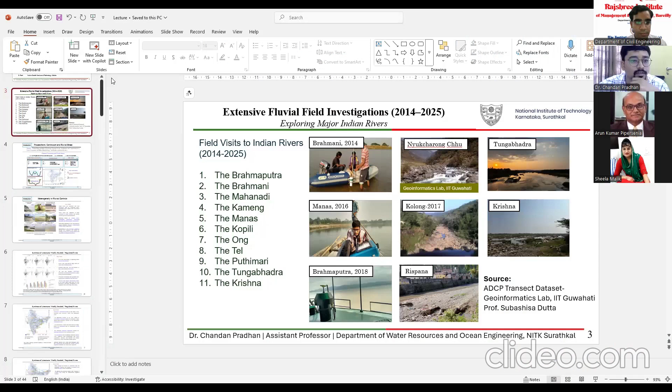I'm Dr. Chandan, currently working as the assistant professor in Department of Water Resource and Ocean Engineering. Prior to this, I did my PhD at IIT Guwahati in Department of Civil Engineering. After that, I was briefly working on the Himalayan River Basin for a smart flood monitoring project during my postdoctoral fellowship. And all my expertise so far is mostly on river recovery, river health monitoring, morphodynamic modeling, and process-based understanding of our Indian Himalayan and Peninsular river systems.

So I have been very grateful to get the opportunity to do my PhD and currently work as assistant professor at NIT Surathkal, very close to the Western Ghat river system. I've been part of many field visits for the last 10 years, including Brahmaputra, Brahmani, and currently I'm also part of a national mission project on Jal Shakti for the Krishna River basin. I'm also going to the field on our Western Ghat rivers, which are very dynamic and beautiful in nature, and their process-form understanding is very complex.

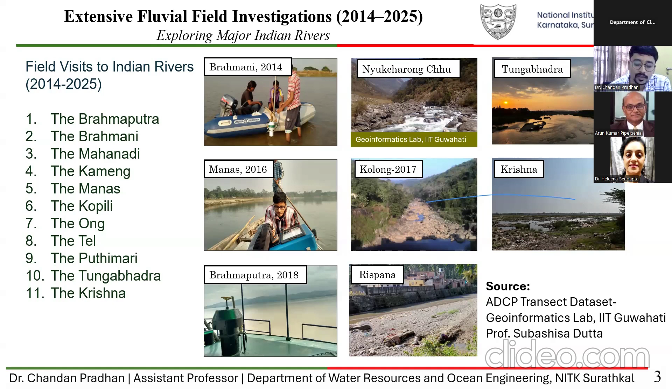So coming to today's session, mostly I'll highlight what our river recovery concept is, how it was started by the Australian and European groups of researchers, how we can implement it in our Indian river system, and what are the current advances in river basin management study in the line of river field visits. So I'll start with how river recovery came into the picture.

So far our knowledge on river health mostly deals with river water quality. For water quality, we have certain standardized parameters with certain ranges and threshold limits. If any two or three parameters change, then we have an idea about what biological degradation or physical changes are happening. So that we associate with our river health.

After 1990, mostly Australian and European groups of researchers started the concept of river recovery. River recovery means we give some kind of disturbance to the river system. After the disturbance, whether the river comes back to a natural state or develops another kind of altered condition, and how it affects the morphology, the biological properties, and the ecological enhancement of the river system.

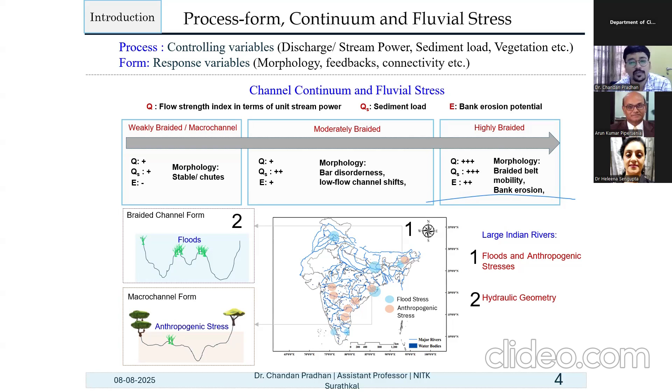So this came into the picture in the late 90s and it was first implemented by Australian researchers. In our Indian river system, the river recovery knowledge is very limited. So far, we have not done detailed study, mostly on the basis of morphology and how the morphology is interacting with our process and form.

So if you go to our Indian river system, the rivers are very dynamic in nature. If you go to the Brahmaputra river system, the Brahmaputra river system is highly dynamic in nature. It can have very high bank erosion. It can have a very large amount of debris load in terms of large tree trunks that can come and deposit during the floodplain. The bank of the river can be composite in nature.

Okay, so in case you go to the tributaries of the Brahmaputra, which are also very large in nature and also dynamic, some tributaries will form a gravel bed, some tributaries will form an alluvial bed. In addition to that, we have the anthropogenic disturbances in terms of dams, weirs, and barrages. So there is a very complex process-form understanding that is happening inside the river system.

Now, if you come to our peninsular river system, the peninsular rivers are mostly stable. Okay, the banks of the peninsular rivers are very much stable, and we can see most of the dynamic properties of the morphological part of this Indian peninsular river system are happening inside the river. So sometimes the in-stream vegetation can be enhanced.

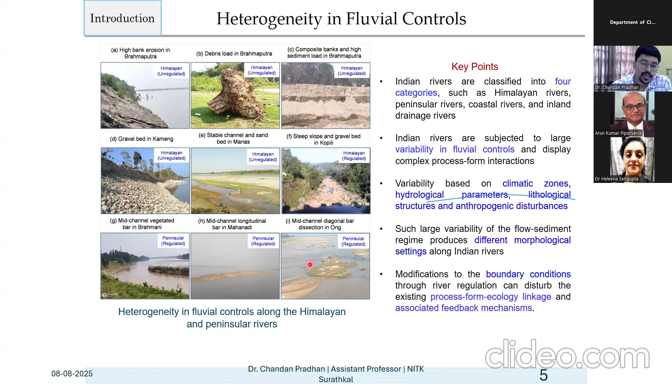So in addition to that, in our Indian river system, we have a very large number of dams, weirs, and barrages. When you build any kind of dams, weirs, and barrages, there are three cascading effects. The first one is the change in your flow hydrology and the sediment part. Second, changes that can happen in the morphology, and the third, the third order impact, is on the ecology part.

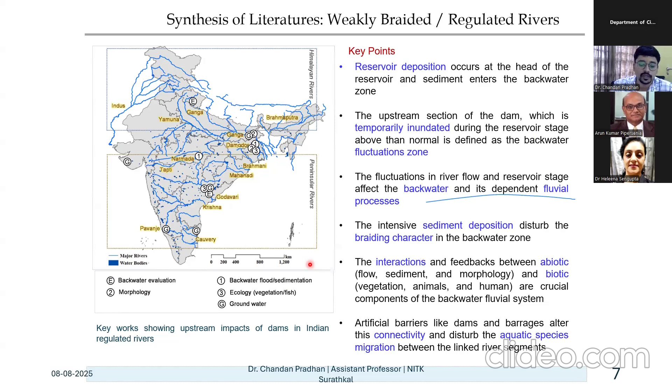So whenever we are disturbing the river, there will be a cascading process, or it can happen simultaneously. That will be the interaction between your flow hydrology, morphology, and ecology. Our river systems are very large in nature. So whenever we give any kind of disturbance to the river, the disturbance propagates both in the upstream direction as well as in the downstream direction. Currently we are only quantifying what changes are happening.

So in order to understand the process behind the changes, we need a very detailed, thorough understanding of what the river resilience is, what the river recovery potential is, how the different components of the rivers are interacting with each other, and how significant the climate change impact as well as the anthropogenic impact is. From that we have different concepts, like 12 concepts of river recovery or geomorphology, such as river recovery, river connectivity, river sensitivity, what is the channel forming discharge at the upstream end, and what is the channel forming discharge at the downstream end.

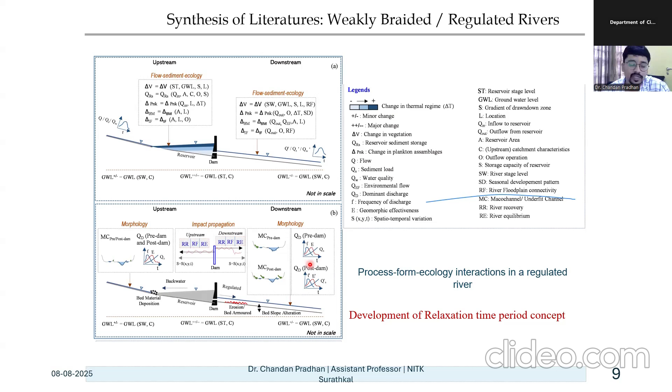So we have a very complex process-form understanding and interaction happening for both our Himalayan and peninsular rivers. As well, when we give any kind of disturbance to the river system, the first thing that happens inside the river is a relaxation time period starts. For example, if we are building a dam in 1980, maybe after 30-40 years the river will adjust to the changes. But after 30 years maybe the disturbance will start to propagate and the river may change its morphological pattern, may change its ecological behavior.

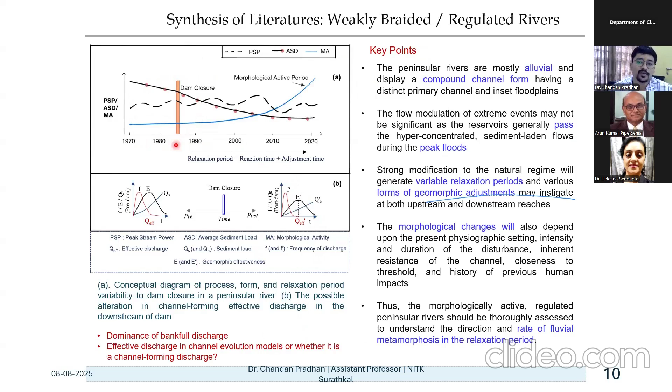So whenever we are discussing any kind of river system, we have to be very careful about how the river dynamics are, how the flow, sediment, morphology, and ecology are interacting with each other, and what additional climate change impacts or anthropogenic impacts are prevailing inside the river system.

So to understand this, we took the first study area, study area 1 in Odisha. That is one large river system, the Brahmani river system.

So in case of the Brahmani river system, it is a large river having a catchment area of more than 39,000 square kilometers. There is a large dam, that is the Rengali Dam, constructed in 1985.

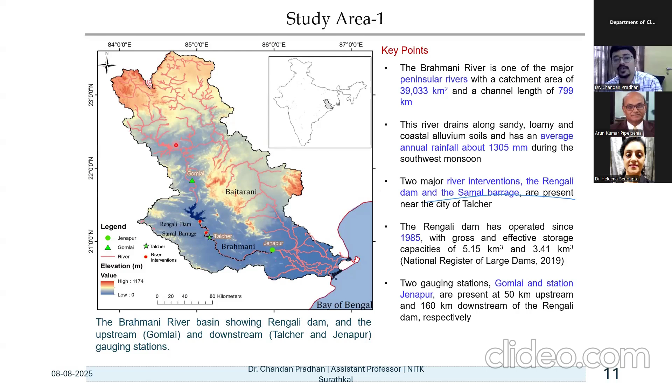So gradually, we have seen during our field visit that braid formation, or sandbar formation inside the river, is happening, and the sandbar formation is very rapidly increasing in recent years in the downstream end. So we thought of how to integrate the channel forming discharge to this kind of river system, where we can quantify which discharge is responsible for braid bar initiation and which discharge is responsible for the changes in the in-stream behavior property.

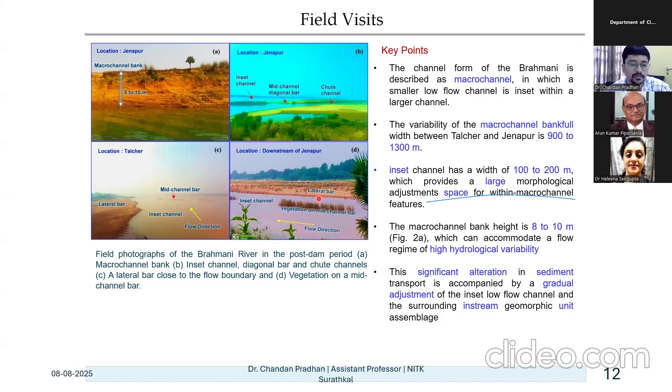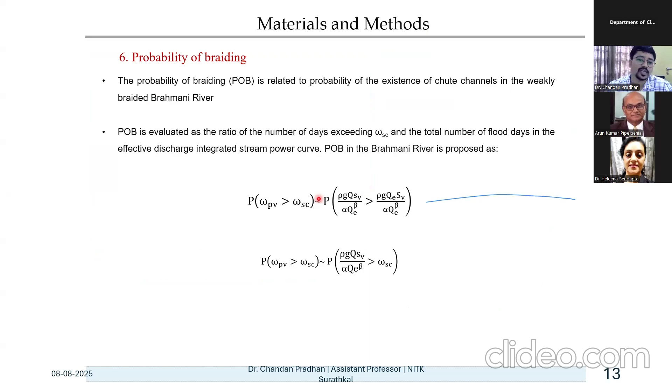At a few locations we have seen that inside the river there will be a mid channel bar, and on the mid channel bar we have vegetation. So there is an indirect indication that the vegetation is gradually stabilizing inside the river system. And we thought of proposing one equation such that we can quantify in future how much change in braiding behavior will be there. So we term that equation the probability of braiding equation, and we developed a concept of threshold energy such that whenever the river is exceeding any kind of threshold, the extra amount of energy the river has can be dissipated forming sandbars or morphological dynamics.

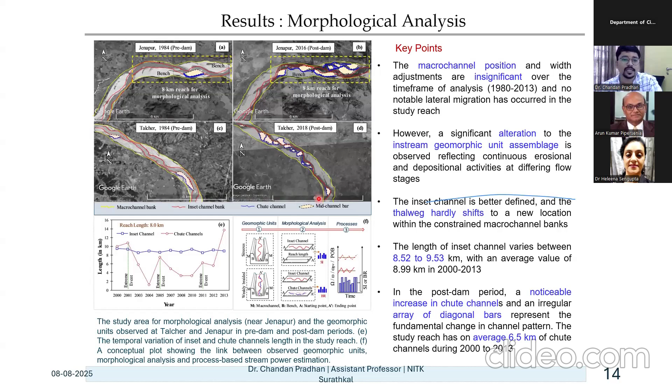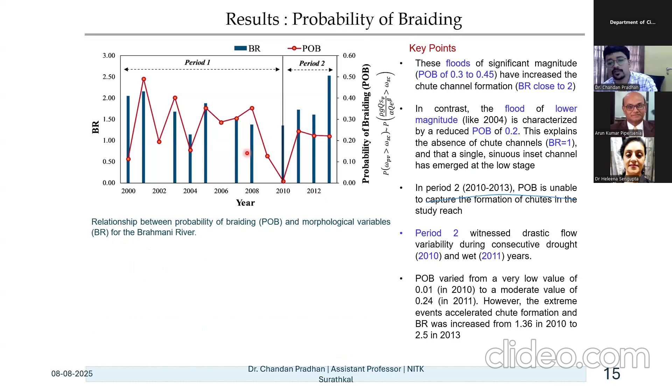So with the help of geospatial technology through remote sensing, we analyzed the Landsat data. We have long-term flow sediment data along with very thorough field verification. We indicated one study area and applied that mathematical equation, and we found that whenever the river is exceeding threshold energy, the river is dissipating that extra energy by forming morphological units, geomorphic units such as sandbars. And if the sandbar is gradually stabilizing, then in-stream vegetation comes into the picture. So the whole idea behind this study was to find out which one is the channel forming discharge.

So in very simple terms, when we talk about the channel forming discharge for any river system, we take that there are three types of channel forming discharge. One is bankfull discharge. That means the flow from bank to bank during very high peak floods that controls the channel. Also, in traditional knowledge we have the effective discharge. Effective discharge is the discharge which carries the sediment load in the long term. So maybe that discharge is responsible for the channel behavior. Also, some researchers have linked a return period of 1.5 years with the channel forming discharge.

So through this study, we propose that in case of peninsular rivers, which are very macrochannel in nature, or have channel-in-channel physiography or compound forms, there can be multiple channel forming discharges. So one channel forming discharge can maintain the high macrochannel bank. One small channel forming discharge can maintain the smaller channel or the inset channel, and in between, the extra amount of energy exceeding the threshold can be dissipated forming sandbars or any kind of morphology pattern. So this was the whole idea behind the initiation of river recovery work.

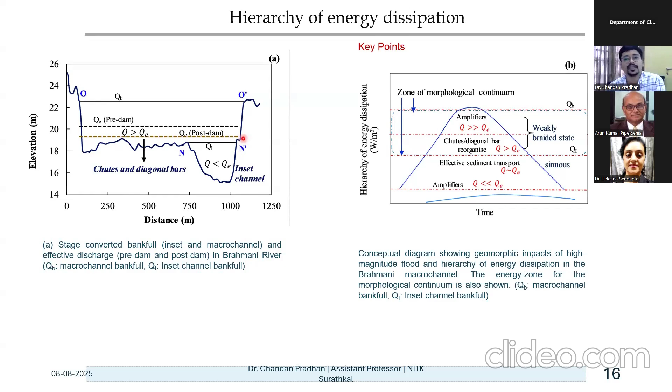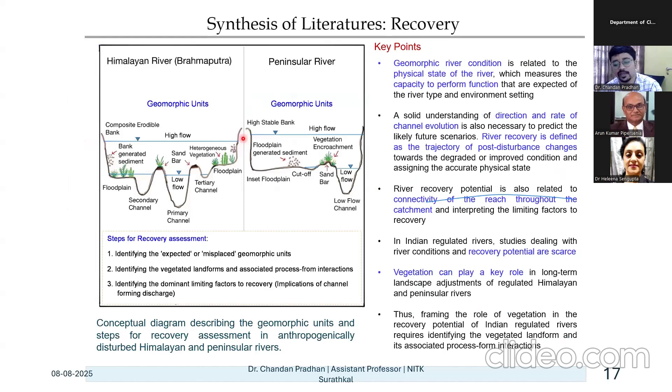So then we proceeded to understanding how we can integrate vegetation landforms into this kind of equation. So whenever we discuss river recovery, as I was telling, this was started from the Australian river, that is the Bega catchment. So whenever we give any kind of disturbance to the river system, it can go to a degraded condition or it can itself create a new kind of improved condition.

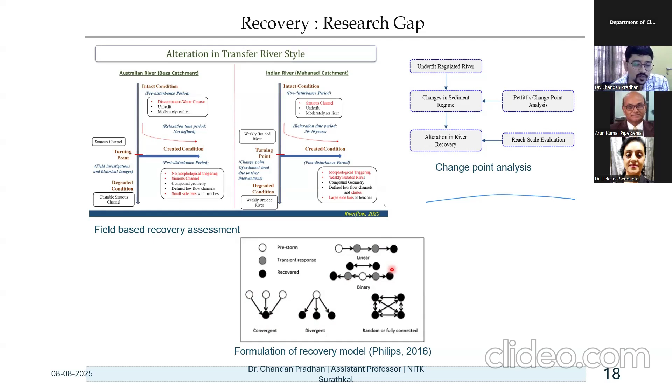So in case of our peninsular rivers, again we saw that if you take one cross section of the river, the rivers are mostly macrochannel form. Here the floodplain vegetation and large tree trunks are there.

In case of in-channel physiography, we can see sometimes chute channel cutoff will be there, mid-channel bar formation will be there. On the bar, sometimes extreme vegetation stabilization will be there. Close to the bank, bench formation will happen. So different zones of floodplain, different zones of interaction between flow, sediment, morphology, and ecology are there, and different types of channel forming discharge can be formed depending upon which zone we are interacting with.

So we have different inundation depth, different duration frequency analysis, different rainfall contribution, different groundwater moisture levels. So this is very complex in nature, and this can be taken as one randomly interconnected kind of river recovery model. Then we proceed to our study area selection.

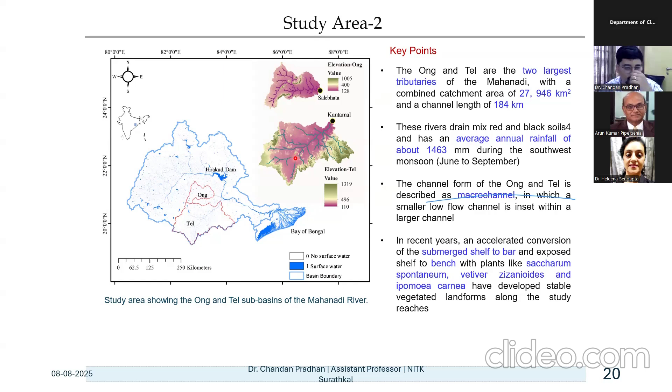We selected the Mahanadi River, one stretch of the Mahanadi just downstream of Hirakud Dam. The Hirakud Dam is a very large dam which significantly controls the flow, sediment, morphology as well as the ecology of the Mahanadi River. We did extensive field visits, mostly in the pre-monsoon and post-monsoon, and we saw that the study area is gradually stabilizing through linear bench formation.

A bench is nothing but where vegetation colonization is happening inside the river. Here the vegetation colonization is mostly on the linear bench. Sometimes close to the low flow channel we have lateral bars, and these lateral bars are colonized by six types of vegetation patches. These six types of vegetation, with different plant form, planting time, spreading potential, and height, indirectly control the morphology as well as the flood inundation behavior inside the river system.

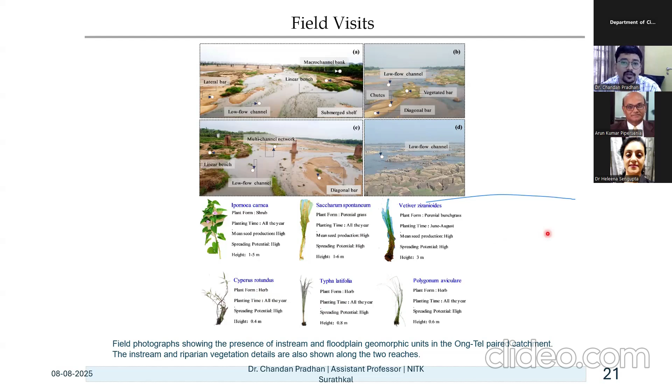So we thought of how to integrate this in-stream vegetation landform into our river recovery model. To propose a river recovery model, we took the help of two indices. One is in-stream vegetation through NDVI classification in the Google Earth Engine environment, through long-term spatio-temporal analysis from 1985 to 2020. We calculate what in-stream vegetation is inside the channel through NDVI.

Also, at the gauging location we took the change in the hydraulic property or hydraulic geometry that is happening. So we developed one entropy indicator that we term the cross-sectional intensity entropy indicator.

Sorry, mistakenly muted. Sir, please unmute. Actually, oh, now it is okay.

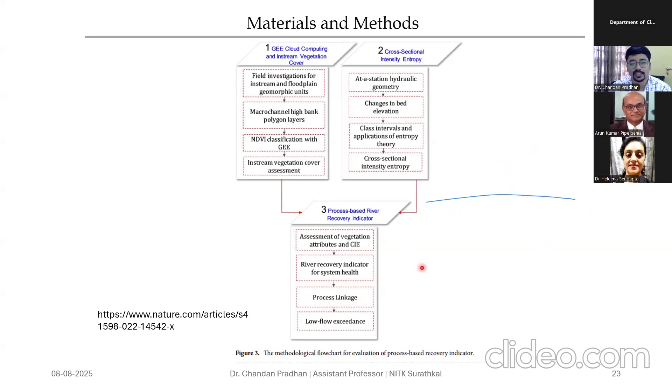Yes, sir. Okay. So we integrated both the Google Earth Engine based cloud computing of vegetation and the cross-sectional entropy, and formed one river recovery indicator that we term normalized river recovery. And we link this normalized river recovery with our process-based indicator from the first study area, the Brahmani, formed through our channel forming discharge.

We took the help of Survey of India topography to analyze the bank behavior. We saw that during the last 50 to 60 years, the main channel bank is very stable in nature. But inside the channel, the vegetated landforms are slowly growing in nature.

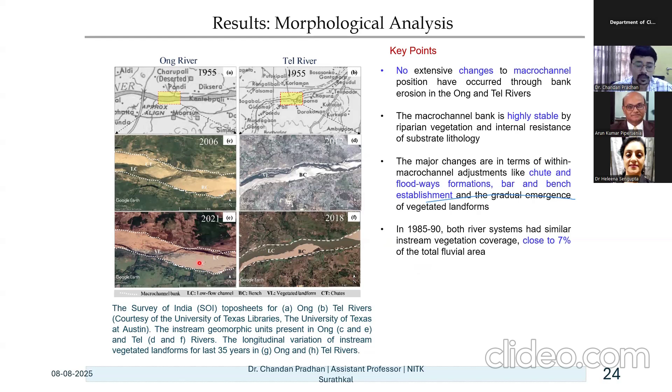So we thought of taking two contrasting study areas, tributaries of the Mahanadi. Both are controlled by regulated flow. And we saw where the high density of plant biomass is. In one case the plant biomass is very close to the bank. In the other case, the plant biomass density is more inside the in-stream channel.

Okay. But in both cases, we have seen that from 1985 to 2020, the in-stream vegetation patches are increasing. So we developed one indicator, the normalized river recovery indicator NRRI, and we linked it with vegetation percentage and the change in the entropy value.

We saw that for the river where plant biomass is significantly dominating over the entropy of the change in channel cross section, the river has a very strong recovery potential. So in a direct way we can say that up to a certain percentage, vegetation inside the river system can help stabilize lateral bars or longitudinal bars and the morphological behavior, helping stabilize the river system, and the recovery potential of the river can be increased.

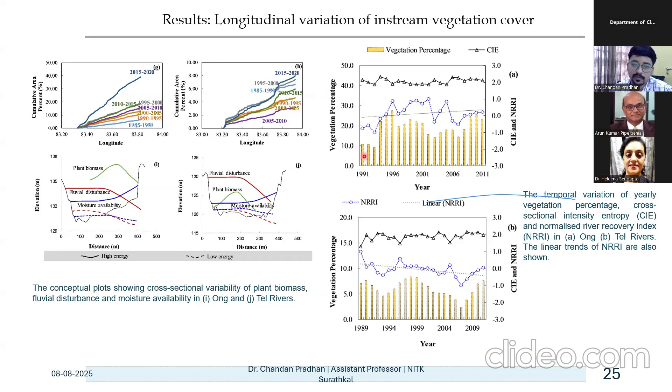So we thought of linking with one conceptual diagram between two endpoints, because we are discussing the river recovery model. Here one endpoint will be fluvial disturbance, that is FD. Another endpoint can be self-organization of the vegetated landform, let's say SO.

So self-organization of the vegetated landform, if it is dominating over the fluvial disturbances in terms of the flood, then means there will be a high chance of the river recovery potential inside the river system, and the river can maintain a very good health or the river recovery health. But where the repetitive fluvial disturbances dominate over the self-organization of the vegetated landform, in that case the morphological dynamic will be very much active in nature, and the river recovery potential may decrease in such river system.

So far I was discussing channel forming discharge and the river recovery for smaller river system that is weakly braided form. But how to integrate this theory for a large braided river system which is very dynamic in nature? That is the Brahmaputra river. So if you compare any kind of peninsular river with our Brahmaputra river system, we can say that the Brahmaputra is very highly braided in nature, whereas our peninsular rivers can be moderately compound, macrochannel form, and weakly braided. The banks of the river can be unstable because Brahmaputra is prone to very much high bank erosion, but in case of the peninsular river, it is mostly stable.

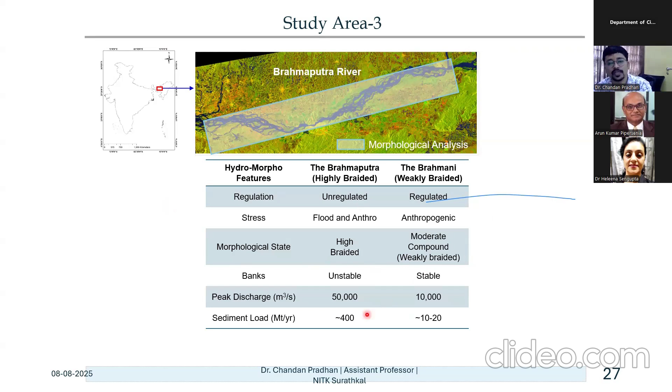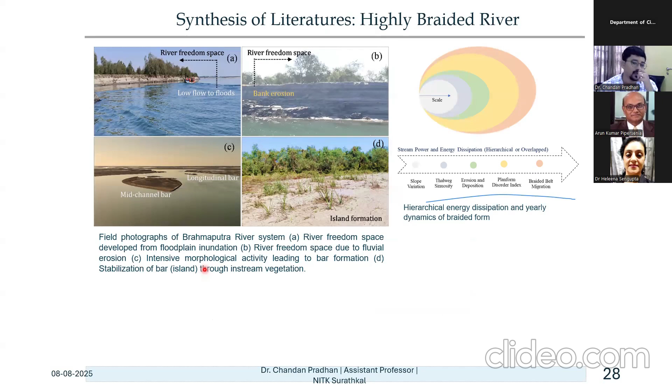The peak discharge in the Brahmaputra can exceed 50,000 meter cube per second. Also, the sediment load can be in terms of 400 million ton per year. So we are dealing with a river system which has very much high sediment load, bank erosion potential, the discharge variability, as well as the morphology. If you see, all kind of geomorphic units starting from the mid-channel bar to longitudinal bar, and the island formations are there. These islands are much more stable inside the nature, and they also contribute to the morphodynamics of the Brahmaputra river system. So how to develop a recovery model and how to categorize any kind of resilience based morphological or management strategy for such highly dynamic nature.

So we thought of taking the help of Google Earth Engine cloud computing. So with the JRC surface water data, we find out the post-monsoon median low flow images. So from these low flow images, we find out what are the dominant geomorphic units there. From the dominant geomorphic unit, we thought of developing one indicator, that is our locational probability index. So I'll not go much detail into this locational probability. That means that I'll assign one probability value to each river pixel inside the river, and what are the chances of getting the low flow channel at the particular location.

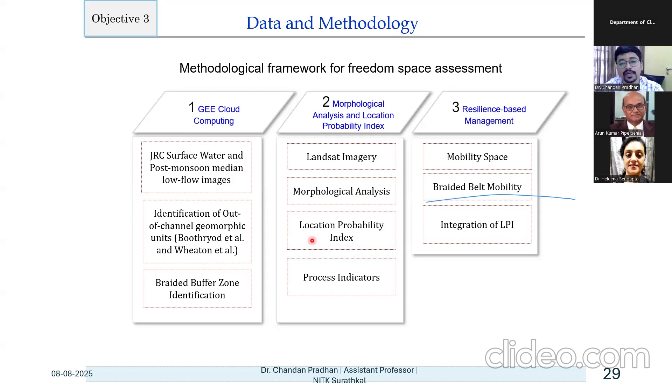So indirectly, this locational probability index will tell me what is the river recovery or the resilience of the river system. Then we linked this LPI or the locational probability index to any kind of process-based indicator, whether it can be a channel forming discharge in terms of the bankfull discharge, effective discharge, or a discharge with certain return period. So for the last 35 years of Google Earth Engine data, we classify the river into different zones. One zone can be nodal point where the river width is very much smaller. Similarly, it can propagate from the moderately braided to highly braided, and we can see the river has very dynamic low flow channel as well as the sandbar dynamics, and they are complexly interacting with each other to form a very much highly braided nature.

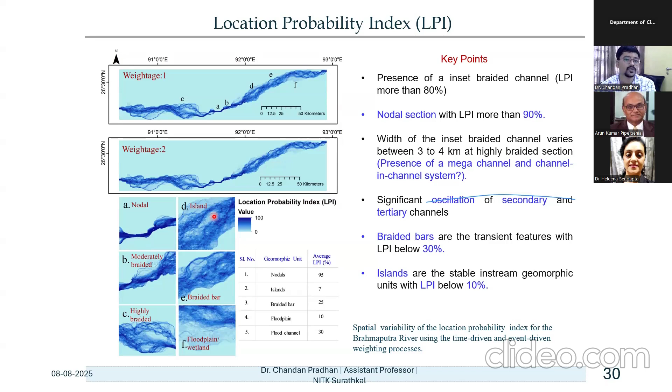So we thought of linking this with this spring theory such that, in a highly braided form, the river may have two thresholds. So one threshold will operate at a low flow end, another threshold will operate at the high flow end, and the river will oscillate between one end of the threshold to the other end threshold. Here, the primary channel will be linked with the secondary channel. Secondary channel will be linked with the third order channel. And all three are connected with the spring theory. So whenever one disturbance to the primary channel is happening, it will propagate to the tertiary channel. And whenever any disturbance to the third order channel, that may also propagate back to the primary channel.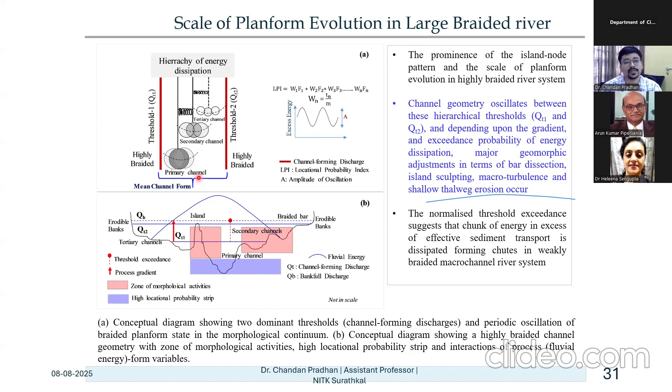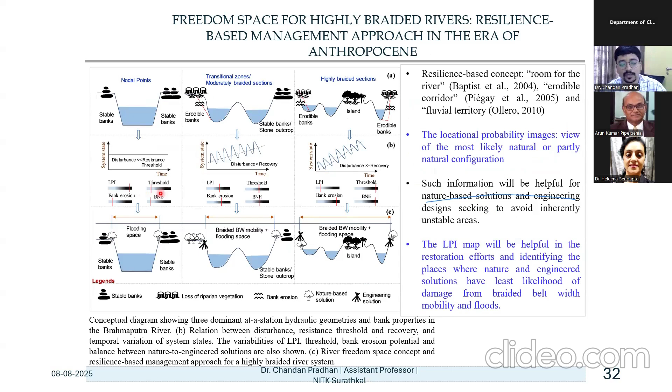So this we published in Catena Journal, and we thought of developing one resilience-based management strategy based on what is my LPI, that is a locational probability index, what is the threshold, bank erosion potential, and what could be the balance between the nature-based solution to the engineering-based solution. So we thought of developing this resilience-based management strategy. So it was finally published in Catena.

So our whole idea behind this channel forming discharge and river recovery is that the river can behave as a spring, may oscillate between one channel to the other channel, and whenever it is exceeding another threshold, that excess energy can be dissipated, forming any kind of geomorphic unit. Sometimes the excess energy can be dissipated by the vegetated landform with a certain percentage of covering the extreme area.

And in case of the highly braided threshold, maybe the threshold will have multiple parameters, and in between the thresholds the excess energy is dissipated. So this whole study was conducted through the combination of Google Earth Engine, cloud-based computing, as well as numerical modeling, and mostly through field investigation of the geomorphic units.

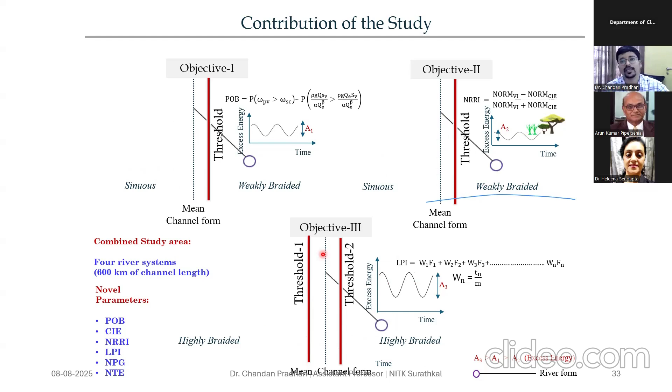So my point to highlight is that whenever we talk about any kind of morphology or fluvial morphology study, field investigation is very important, because in one project we thought of developing a national waterway. So we went for a field visit, and we saw that in the British time period a weir was constructed, and at this location the river is mostly stable. Such field photographs are also very helpful for validating our numerical model.

We also did many field visits to the Brahmaputra river. In the Brahmaputra river, we have seen that the mid-channel bars are very large. Inside the mid-channel bars, islands form. Sometimes inside the river, on the mid-channel bar, the nutrient content after the flood will be very high, and these are used for agriculture. So we can say that the socio-economic condition of nearby locations also depends upon the river, and people depend on their agricultural livelihood inside the river system. So this is one part of river understanding through field investigation.

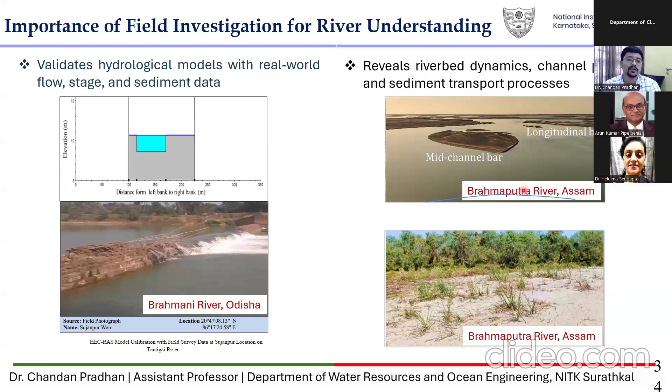Also, there are recent advancements in artificial intelligence and machine learning that can help us understand our river system. Recently I was talking about the locational probability index, how it was developed through Google Earth Engine cloud-based JRC data. With Google Earth Engine, we can see what the channel-forming discharges are and how they change water occurrence through any kind of disturbance. Currently in the Himalayan and Peninsular river systems, we have many engineering solutions as well as nature-based solutions. So we need a very detailed understanding of our rivers.

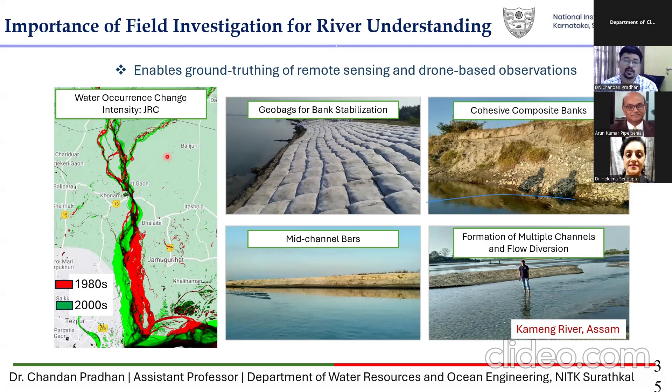Also, currently I'm part of the Ministry of Jal Shakti Krishna Basin project. There, too, socio-hydrology has a very strong influence. So we are conducting many human-river interaction studies on how humans depend upon the river system, and how we can develop a resilience-based or recovery-based management strategy that can help the local community and prevent risks such as flooding or any kind of disturbance between humans and the river.

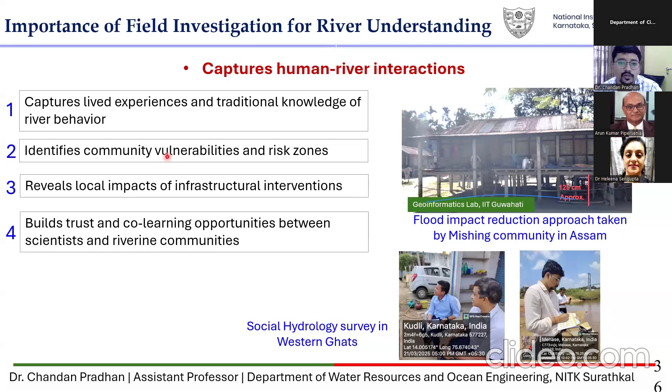For that, we have conducted many field visits with river survey equipment. Currently we are working with the ADCP, the acoustic Doppler current profiler, and an echo sounder. The ADCP and echo sounder both give bathymetry data as well as the three-dimensional velocity profile. From the three-dimensional velocity profile, we can link with an empirical equation for suspended sediment data generation.

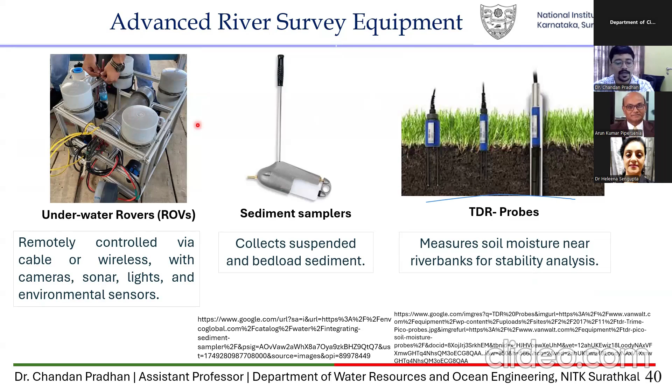Also, I want to emphasize that our rivers are very dynamic. So whenever we are understanding a river, a multifaceted approach is required. That approach can include remote sensing, numerical modeling, and physical modeling. But nowadays we also have to implement field-based investigation, because there is a complex interaction between flow, sediment, morphology, and ecology in our large river systems.

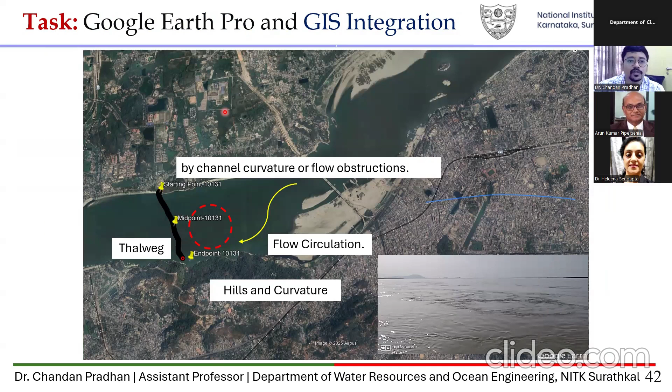So students can go through this. Many websites are there that can be helpful for understanding river recovery. One website is the JRC Global Surface Water Explorer. Here they can see water change intensity, water seasonality, and annual water occurrence for 40 years of data. This has been published in Nature, and students can go through it. That is the JRC Global Surface Water Explorer.

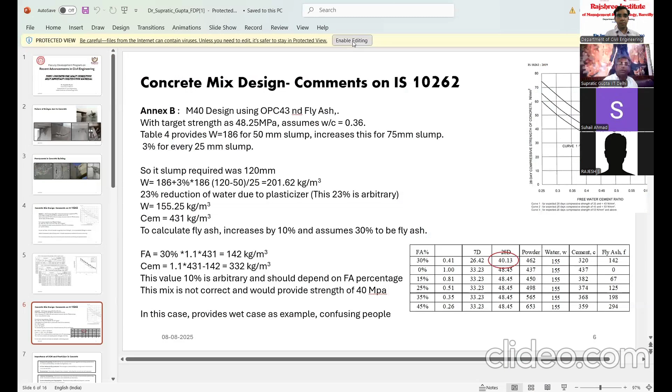The slides moved away completely. Yes, slides moved away completely now. We don't see the slides. I've not changed the... No, actually, slideshow is not visible, sir. Slide is not visible. Yeah. I think I removed the... here. What about now? Yeah. Okay. So in this example, the slump was 120 mm. Kindly, can you show the second slide once, sir? Because we have not seen the slides. I'm not able to hear you. Hello? I think I wrongly muted, sir. Have I muted? No, no, okay, sir. Continue, please, sir. Okay. Shall I continue?

Yeah. Okay. So basically, it is an example where 120 mm slump is assumed. By that, the water comes out to be 201. And again, the same 23% has been taken. The water comes out to be 155. And based on W/C 0.36, the cement was calculated to be 431.

And to calculate the fly ash, it arbitrarily increases this value by 10%, and then assumes 30% of it is fly ash. So the fly ash becomes 30% of 1.1 times 431, which becomes 142 kg per cubic meter. And cement accordingly will be 332 kg per cubic meter. You can see the table on the side.

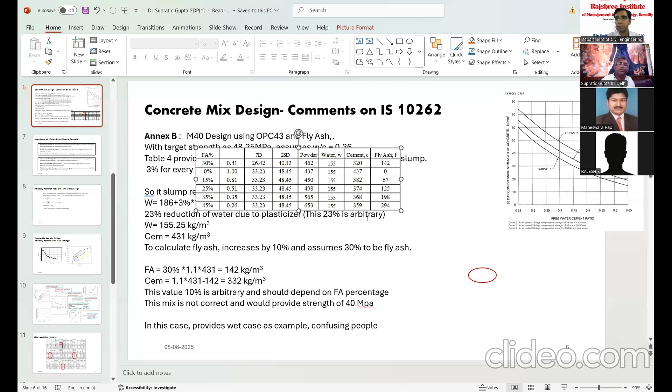The first example is this. According to my calculation, the strength of this will not come to 48.25. It will come around 40 MPa, and this is absolutely a wrong design. And for this 10%, I'm giving you the example of 0%, 15%, 25%, 45%. Maybe I will help you by increasing the size of this graph so that you can see it better. Can you see the table now a little bigger?

Hello? Yes, yes, sir. Yes, sir.

Okay. Now you can see the correct examples of 0%, 15%, 25%, 35%, 45%. And you can see as I increase the fly ash percentage, the powder content is continuously increasing. So this 10% which they have assumed is not a standard rule. It actually should depend on the fly ash percentage. And you can see that all these five mix designs will have the same strength, and the cement quantity is gradually going down. And this type of example is not possible by 10262.

And imagine a country like us, it is still not able to provide a mix design method to our country, and they are all so knowledgeable people, and still they are not able to give us a design where people can follow the code and provide the design. It is actually a very sad state of the world.

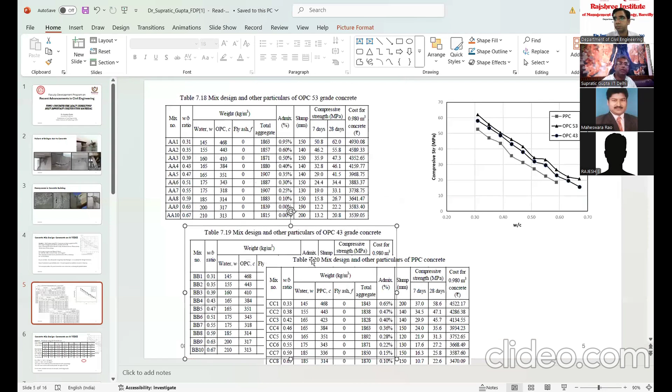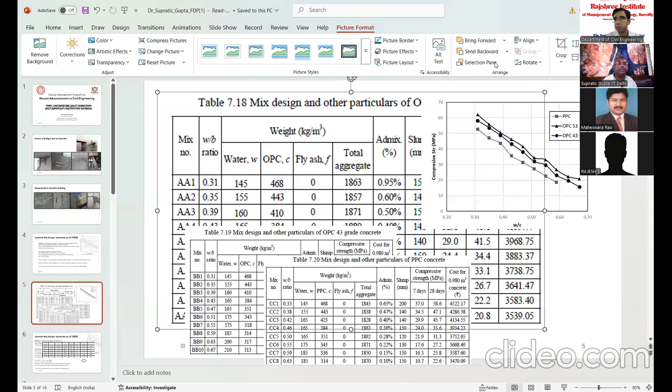From this, basically, I'll go back a little more slides here. This graph which I had shown, that is OPC 43. This is the graph. You can see as the mix design proceeds, when the W/C is very low, we can take a low quantity of water. But when we want to increase the W/C for low strength concrete, we have to increase the water, because in control concrete, the powder quantity is not sufficient.

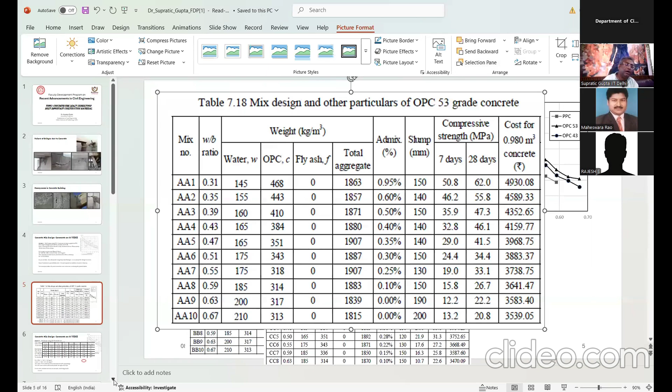However, when we do fly ash concrete, the powder becomes sufficient, and we can have the lower amount of water, and we can have good concrete. So with fly ash design, as we have seen in the next slide, we can achieve very high powder content. And when the powder content is good, the concrete is like a paste, and it is very cohesive. And the concrete surface that comes out is very, very beautiful. There is no segregation inside the surface.

Just some time back, in Ranchi, one construction took up fly ash for the first time, and after the construction, they came back and told me, "Sir, the surface is so beautiful that we can't imagine with control concrete." The reason is because of the extreme this thing. If we use fly ash, the durability is enhanced. It becomes economic. Again, going back to the slide, the most expensive thing is the cement.

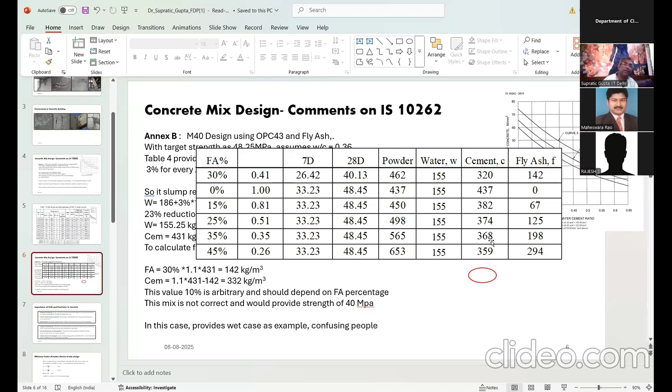You can see that it starts with 437 for control concrete, and at the final 35% you take 370 kg. So you can assume almost 67 kg of cement has been saved. So it's a huge saving in cost. And we also get durable concrete, cost benefit, and it also utilizes a byproduct of the industry. So we are having an environmental benefit. Segregation is not there, bleeding is not there, and the mix is very good, and the finish is also very good.

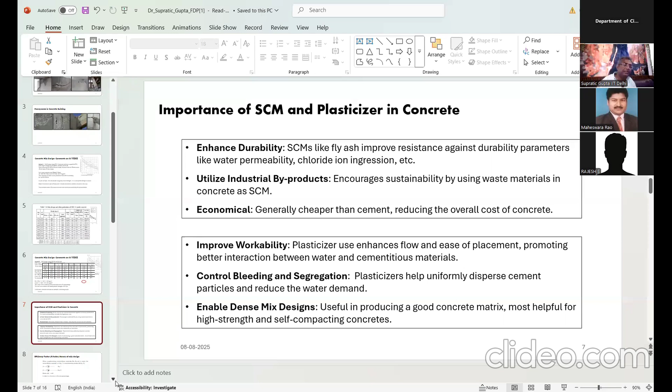So it is actually sad that in our country, in the unorganized sector, fly ash is not available. They are forced to use PPC, which is not a good choice. Till we understand our rights, that we also should be able to get the OPC plus fly ash mix, we will always be misutilized by our cement industry. PPC is not good in any sense, neither in durability, nor in powder.

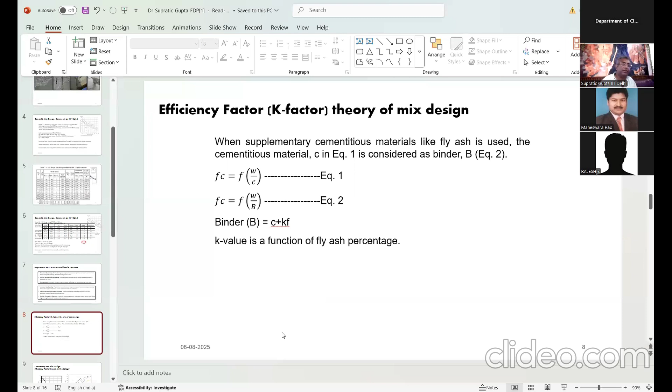So the mix design that I follow is where we have a concept called efficiency factor, where efficiency factor is defined by the equivalent cement of the material being used. So if we are using fly ash, it is the efficiency factor that we take, and the K factor is given in this graph, which is decreasing, and as a result it is actually a less efficient material but very good for concrete because we can achieve that at a low cost. The side graph which you can see, I will just make it a little big for your visibility.

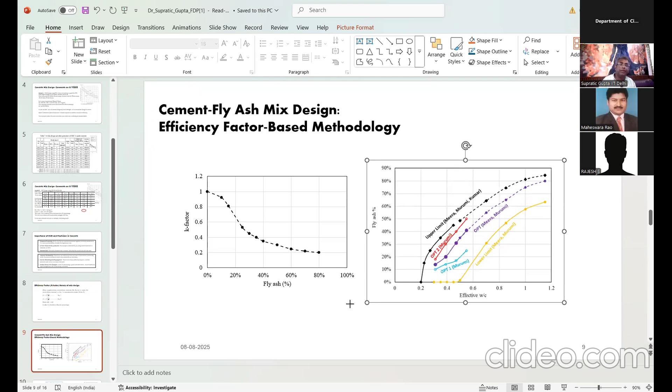This is the fly ash limit. Till around 0.5 we can cast control concrete. After that it is impossible to cast control concrete, so we must incorporate some sort of powder, whether the powder is from fly ash or marble powder. But without sufficient powder we cannot make good workable concrete. So you can see there is an upper limit and a lower limit and the optimum limit.

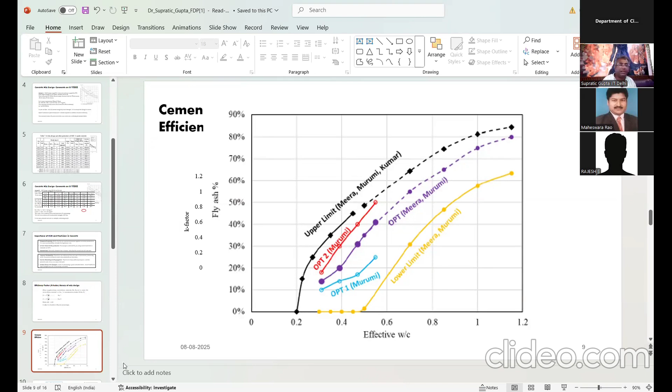The three... was done by Murumi, and the high strength to normal strength extensive work was done by Kumar, and the low strength part was done by Meera. That is how this graph was developed, and based on this, we do our mix design, and this is the process basically. We choose first. We take the grade of concrete.

In grade of concrete, suppose M40, the design target strength is 48.25. In our method we add another 3 MPa to it and make the design. Why do we do it? Because every time we do casting there is an error in the casting process also. So to take care of that we add another 3 MPa to it. So M40 we design generally for 51, 52 MPa.

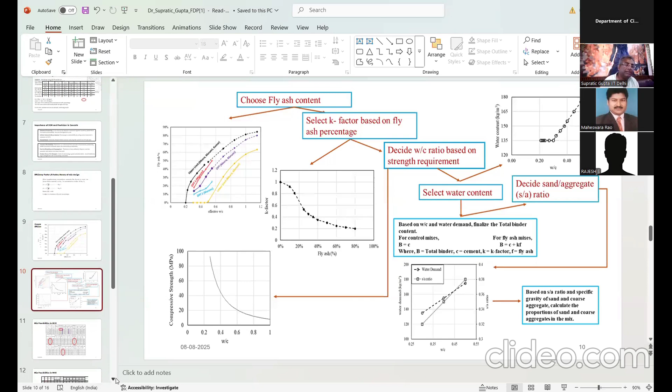From that we find out the K factor, the W/C required, and based on W/C we find out the fly ash percentage, and based on fly ash percentage we'll get the K factor and we can do the design. In the design, let us see an example design. Again I will maybe magnify it a little bit.

In contrast to this, if we go for the next design, that is the M40 concrete. So in M40 concrete, this is not M40, basically it's 47. So that implies it should be around M35 concrete. So this is not correct M40, this is M35 concrete. So in that sense, you can see 0 to 35% fly ash we first take, and we can decrease cement content.

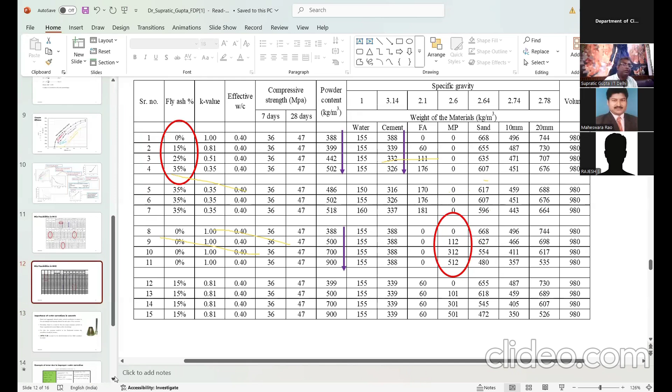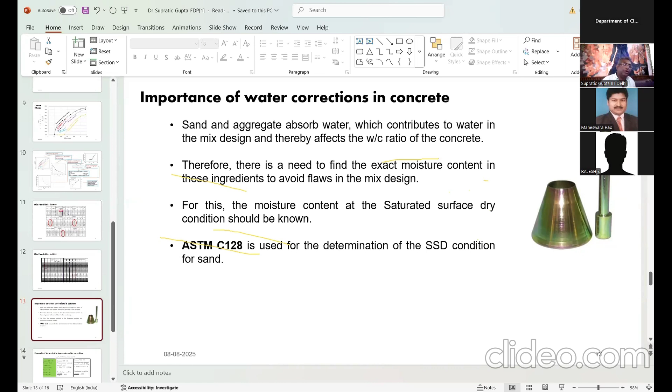Now, the most important thing that I always talk about in the class is the water correction. For water correction, we always have to find out the saturated surface dry moisture content, the water absorption and the specific gravity. We follow the American standard using the cone method. And after finding out, we have to do the water correction. The example I am showing is the effect of water correction.